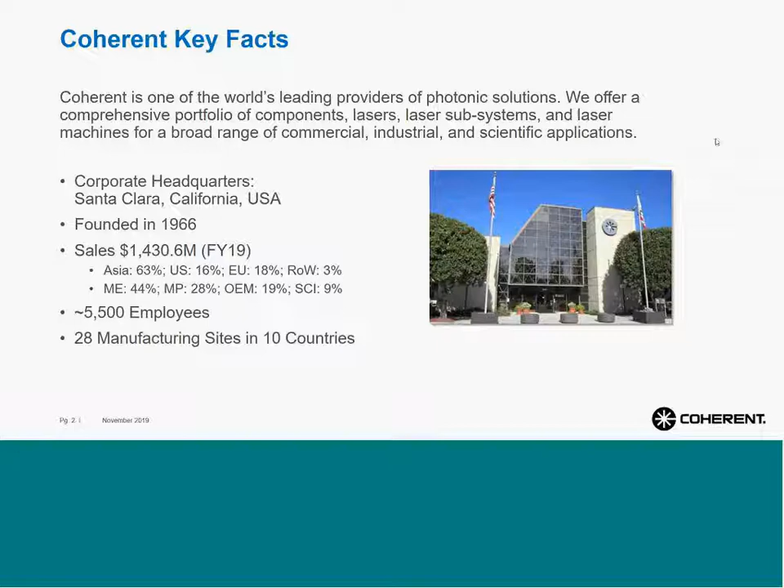So the main markets we are acting in are four markets. The biggest one is microelectronics, that means production of LED and OLED flat panel displays, as well as a lot of applications in the semiconductor industry. Materials processing, I will talk a little bit more in detail later on, but we have also developed and produced photonic solutions for life science, components and instrumentation, for example medical applications like eye surgery or counting blood cells in blood streams. And the last market is scientific research and government programs.

In materials processing, when a laser beam interacts with a material, you can have different effects depending on the wavelength and the pulse length of the laser. So we manufacture and supply CO2 sources for material processing, as well as diode-pumped solid-state lasers and fibers, both pulsed and CW, ultrafast lasers, diode lasers, excimer lasers, as well as tools for most of the material processing applications, as you can see over there.

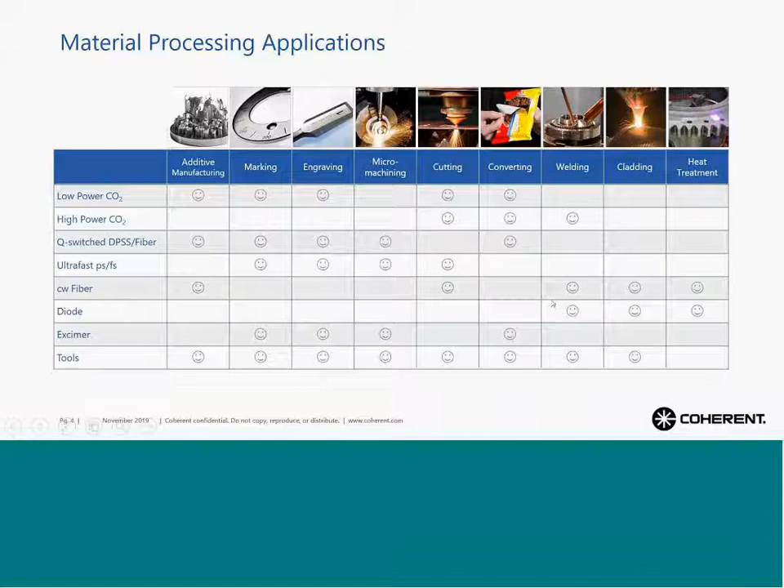Since we are short of time, I will go directly into the topic. But first of all, I would like to invite you to let us know what your applications are, because we have a broad range of application labs around the world. We like to share with customers what the application is, so we can discuss together what the part design can be, what material combination can be the best, or what the right laser source is for your application. I would like everybody to contact us and work together on how to solve your production challenges with laser technology.

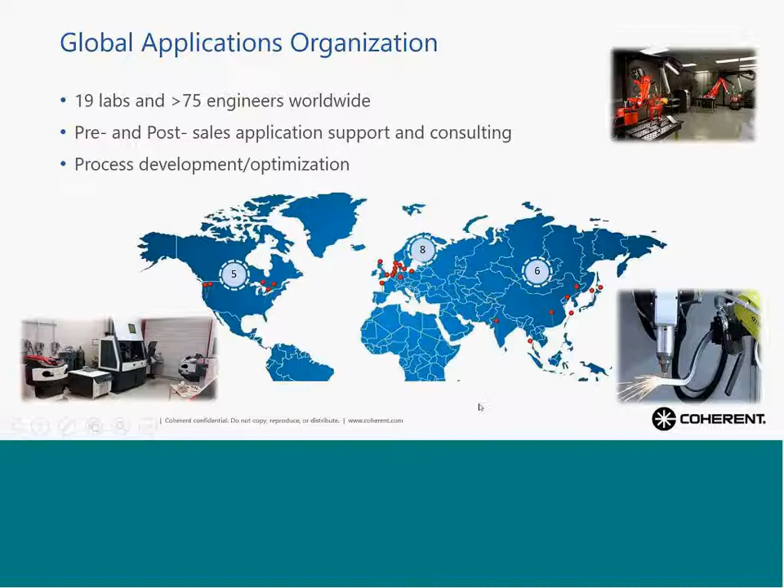So coming to the topic, in electric vehicles we have battery production, and I would like to separate the production into two parts. One is the production of battery cell assemblies, and the second one would be to pack those cells into a box, depending on the requirements of the vehicle.

So as I said, in battery cell production we can have lots of applications: pre-treating the electrodes, coating, tailoring, connecting, joining. And on the battery packs, where we assemble those cells, we can have also many applications like cleaning, marking, welding of the busbars to connect the cells themselves, or to weld the housings.

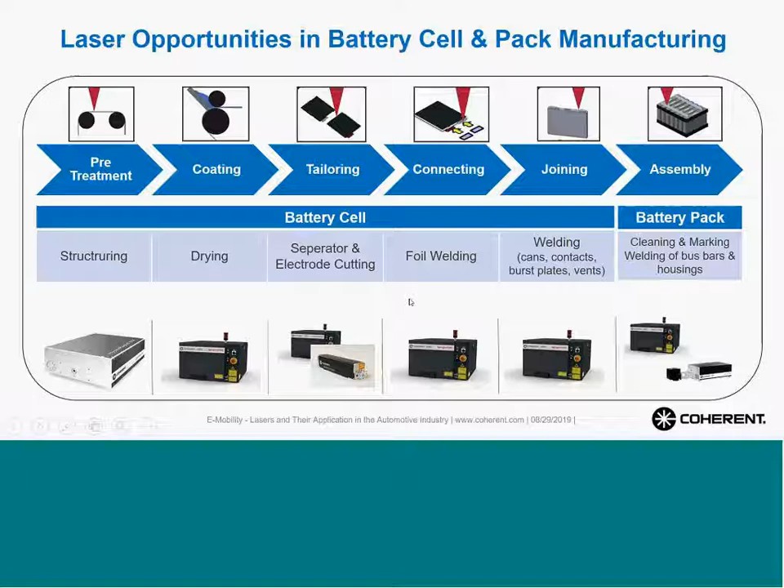I'm not going to go into many details, but I would like to choose some of the applications just to give you some color of what lasers can do in this market. For example, one of them is electrode structuring. The idea is to generate microstructures in order to increase the surface area and therefore improve the charging and discharge behavior of the battery. For this, we can use either excimer lasers or ultrafast lasers.

For example, with ultra-fast lasers, we get almost no heat input on the electrode and no melting effects. This is valuable to achieve the right result.

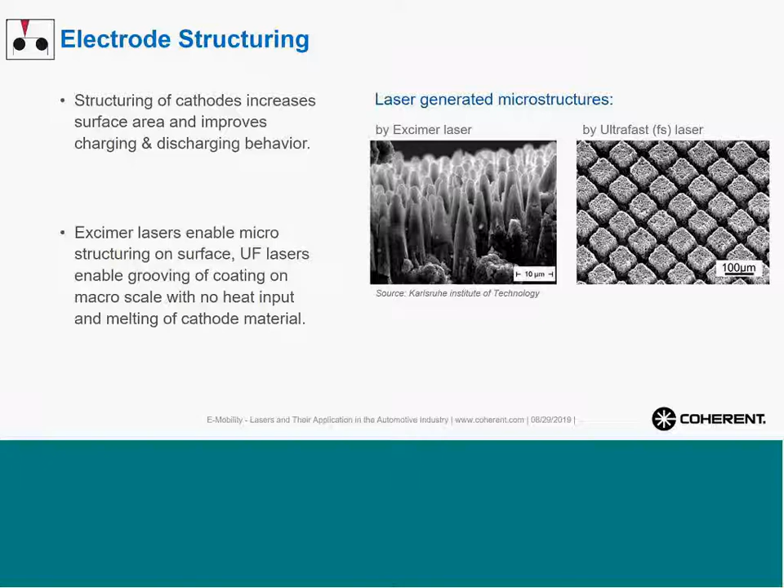Another example is to isolate negative and positive plates with polymer-based material like polypropylene or polyethylene. Traditionally, this is cut with punch presses or knives, but that causes tool wear and variable cut quality. With the laser process, we use scanner solutions achieving high speeds, above 1 meter per second cutting speed, using CO2 lasers for these materials. For future ceramic hybrid batteries, lasers can also play a role in cutting.

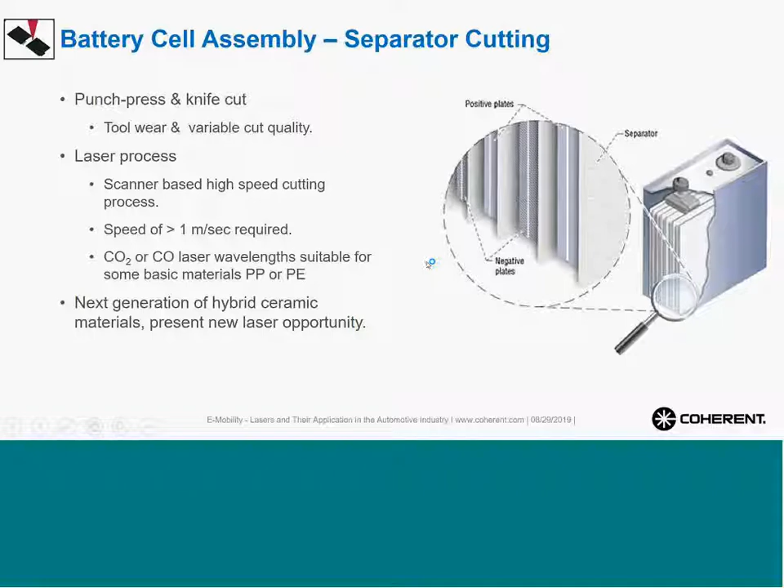This is another example. I chose this one because here we are welding two different materials, aluminum and stainless steel. This is a CID, the current interrupting device, a safety device installed in batteries which prevents the battery from failing. As soon as the pressure inside the battery increases, usually due to temperature, this device cuts the current to protect the battery.

The 18650 cells are quite well known because I believe these are the ones used for Tesla cars.

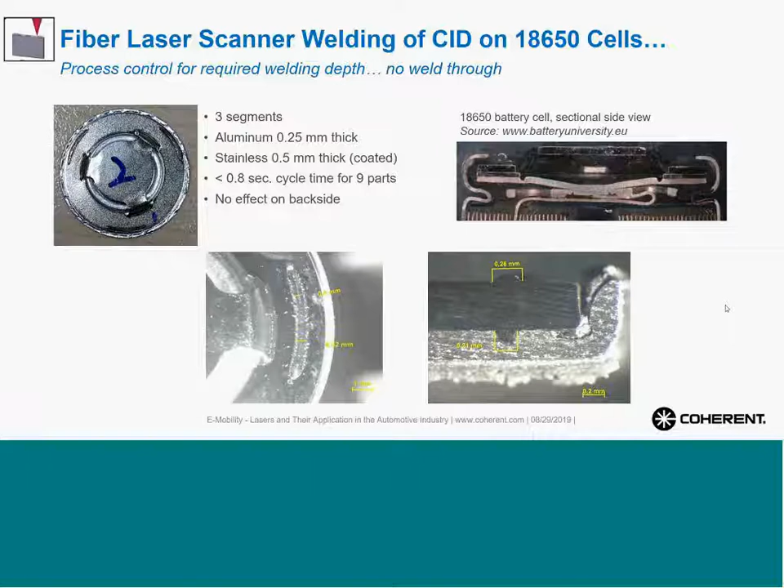Another example of a similar device, but in this case joining metals and plastics. What you do is create a structure in the metal that helps bond, with heat, the plastic and the metal itself.

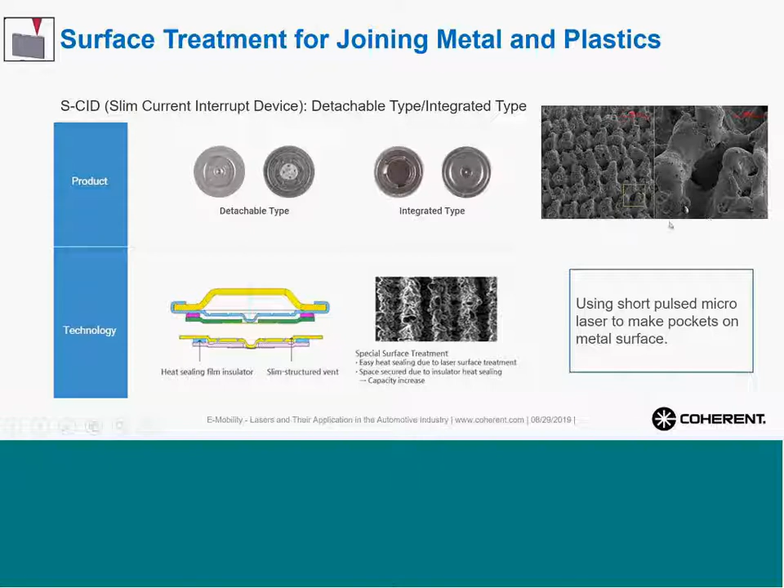This is for connecting welding terminals. Here we face challenges because materials like aluminum and copper have to be welded in a way that current later passes perfectly. Therefore you need to design an optical setup and choose the right beam quality to achieve a perfect result.

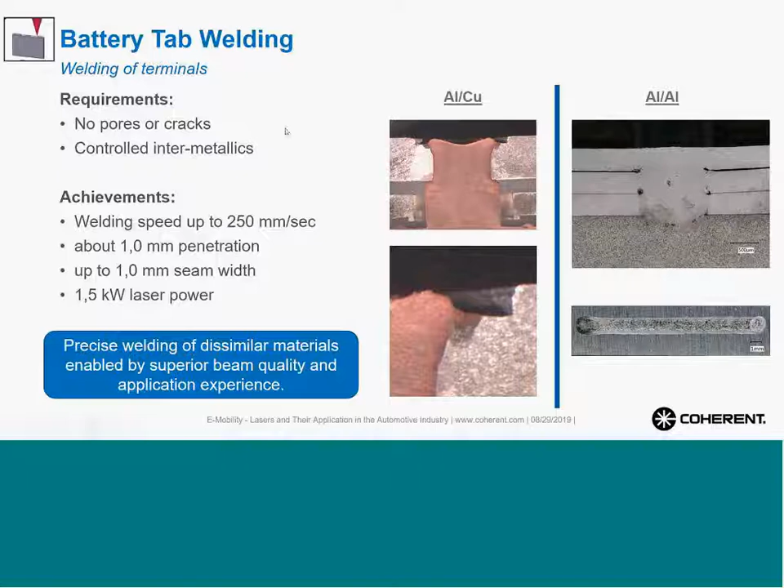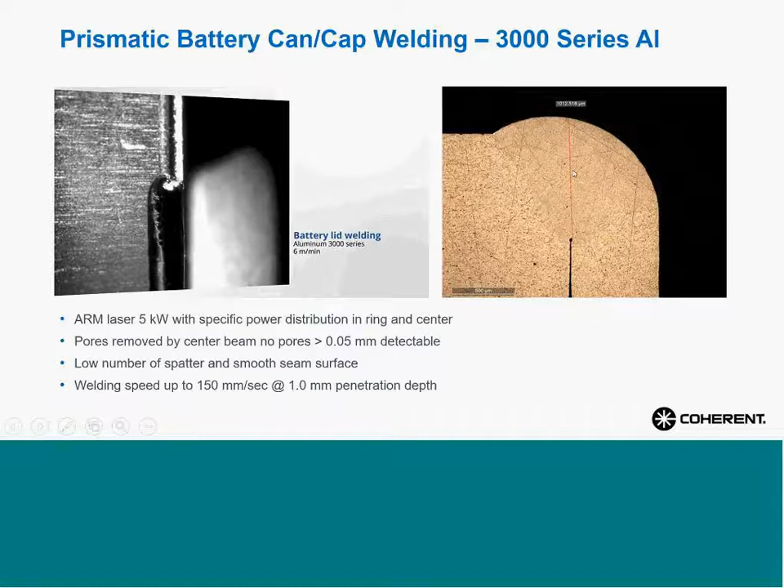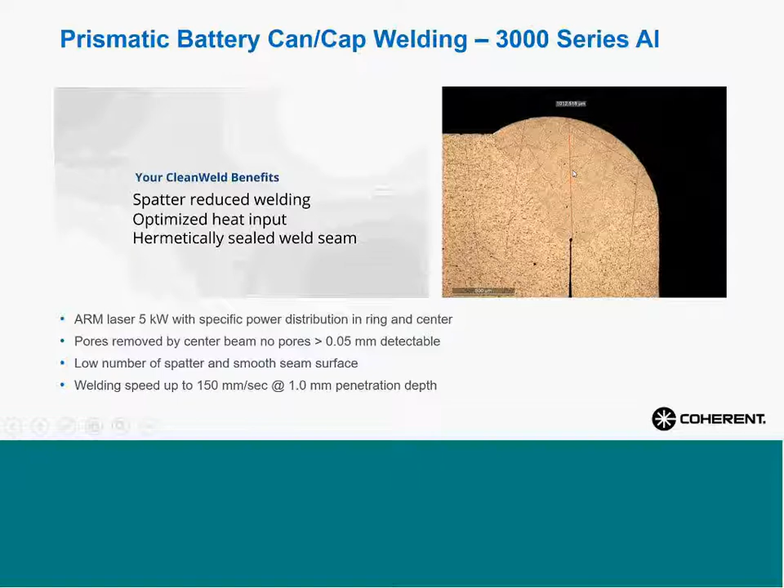This is another example of welding 3000 series aluminum for prismatic battery and cap welding. Usually aluminum welded by laser has a lot of challenges, mainly micro cracks, hot cracking, pores, and spatters. As you can see in the video, we can manage and modify the beam quality in order to get a very smooth, very stable, no-spatter welding solution with no pores inside.

Another application is cleaning of the housing, to eliminate any contamination from electrolytes or other debris created during manufacturing. The idea of cleaning is to later paint a protective layer, and this cleaning must not be abrasive, must keep the wall thickness, and as you can see in the picture below, the roughness stays almost constant on the surface.

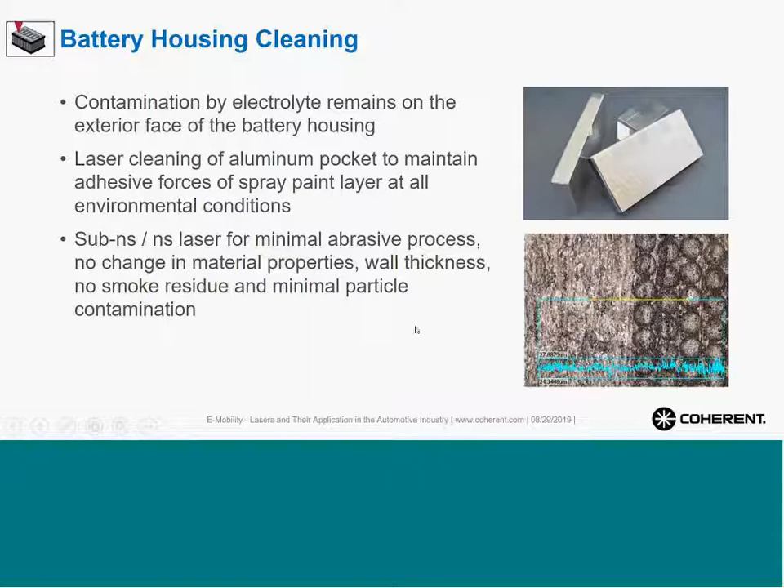This is another very demanding application at the moment, especially in Europe: the connection between different cells to get a more powerful battery. Materials here are also challenging, since we can have aluminum, copper, or nickel-plated steels. Usually the solution includes a 2D scanner with a high power fiber laser. For example, with a 2 kilowatt laser, you can get 2 millimeter penetration in aluminum at 4 meters per minute welding speed. Scanners also bring full flexibility to make the connection as robust as the application requires.

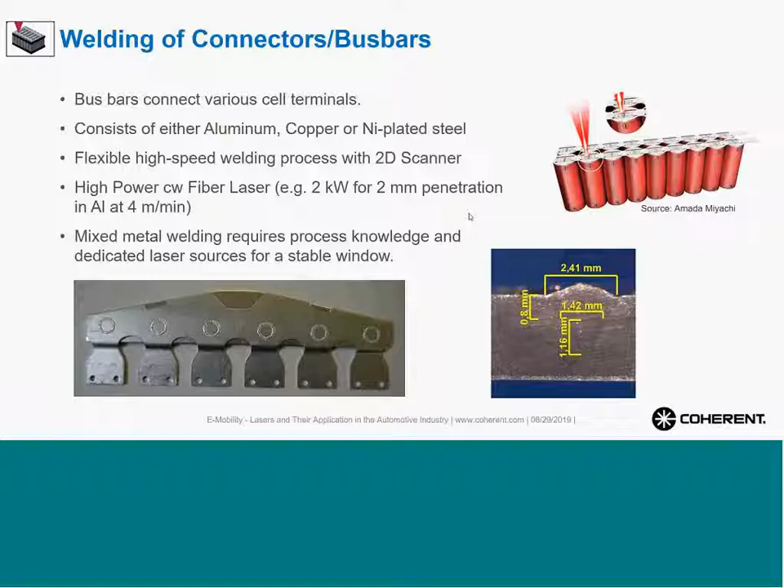Last but not least, another example is marking directly on the product. Usually you need to trace each battery with a single unique code, so we use data matrix codes marked directly on the product. This code stays there permanently, and the marking is very fast and fully flexible, giving full traceability of the product and full readability later on.

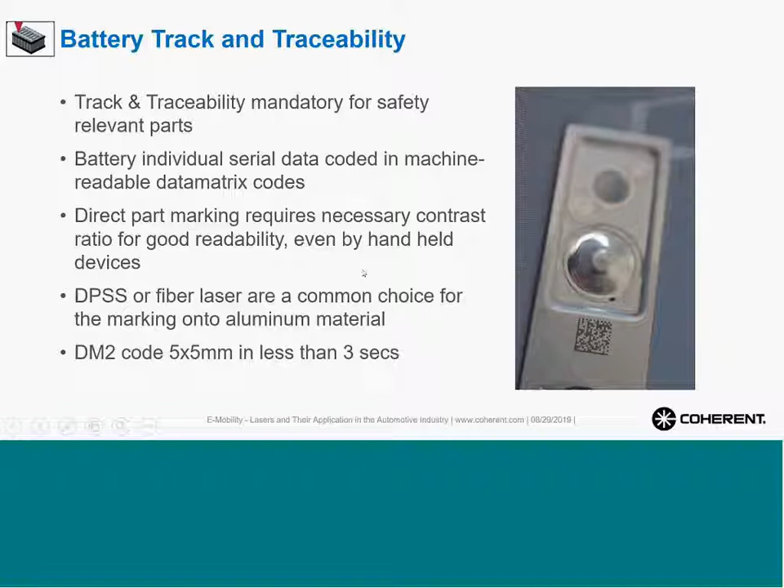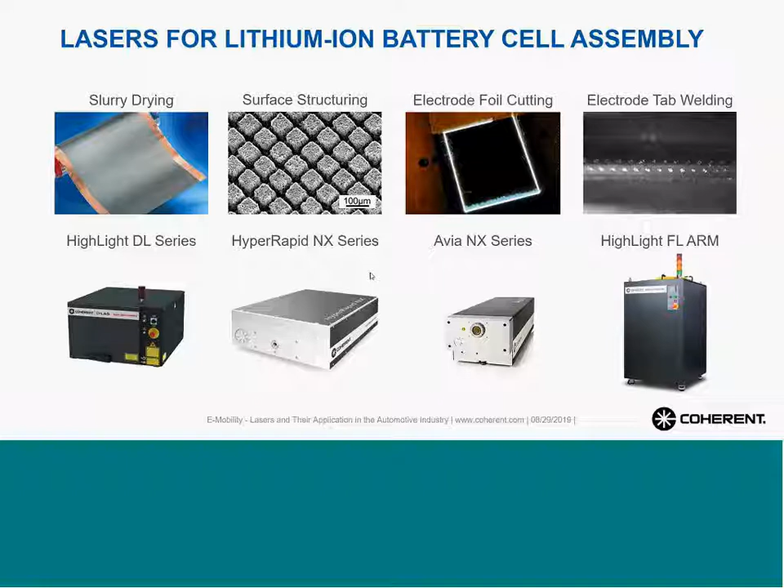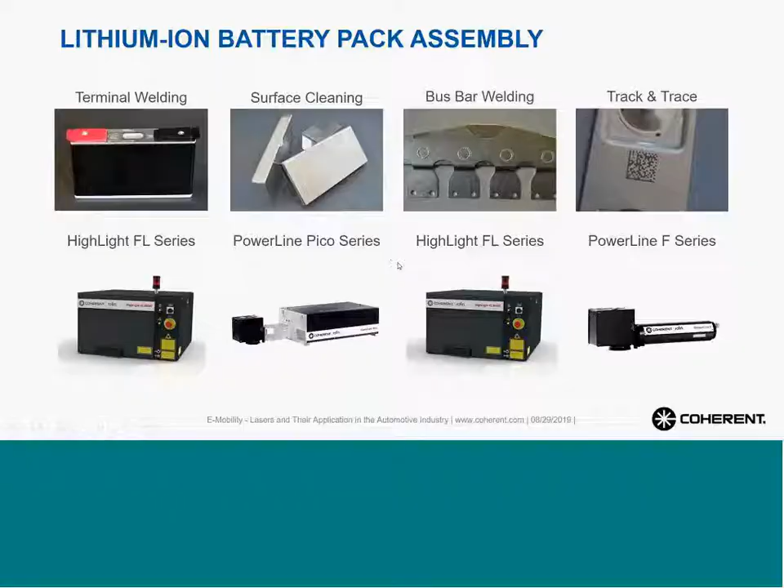I don't want to go into too much more detail. As a summary, just to let you know, we have sources for many various different applications. Let us know what you are looking for, and then we can work together to optimize your process. Thank you very much for listening, and I'm ready to answer any questions you may have. Thank you.

Okay, thank you, Mikel, thank you very much for your talk. It's interesting to see how many small parts of the batteries are being used or affected somehow by laser processing. I don't see any question around here. If you don't mind, as we are a bit tight on time, I might prefer to move on.